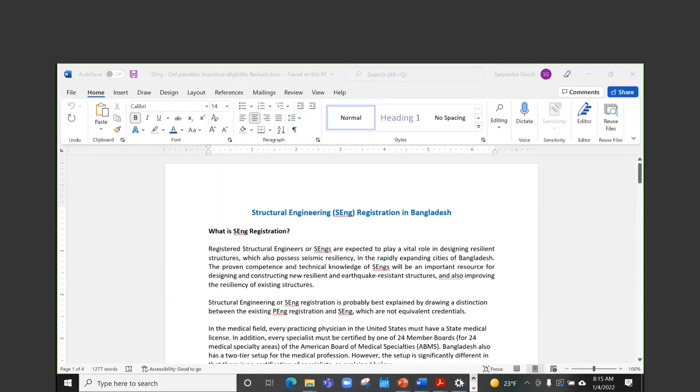So we have a two-part presentation today. The first part is just a general introduction to building codes. We thought that that would be an appropriate beginning to the whole program.

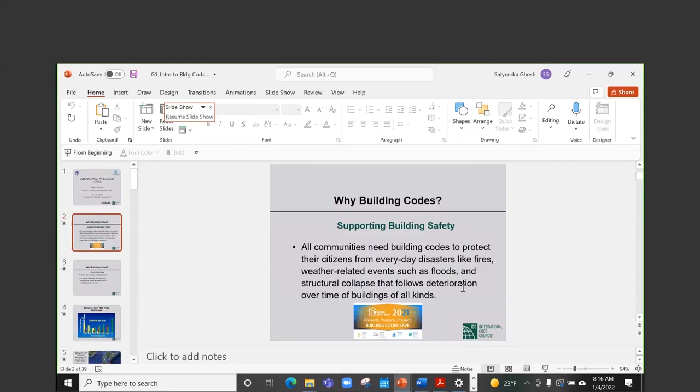Rather, first question, you're not on the slideshow mode or presenter mode. Oh yeah, okay.

Yeah. The first question is, we are spending a whole lot of resources and effort in trying to get BNBC 2020 implemented first and then enforced. But why? What is the importance of building codes? Why building codes?

So this is very basic. All communities need building codes to protect their citizens from everyday disasters like fires, weather-related events such as floods, and structural collapse that follows deterioration over time of buildings of all kinds. Okay, so protect citizens from everyday disasters, protect citizens from disasters that happen once in a while like floods, and

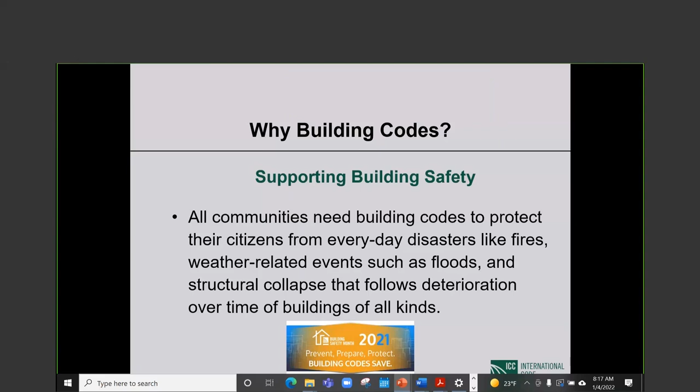age-related deterioration ultimately will destroy any structure, and to the extent that we can take steps to preserve structures to prolong their life, that also belongs in building codes. Building codes serve as a means of prevention. In a very basic sense, building codes prescribe preventive measures to keep bad things from happening. It provides us with a choice between an ounce of prevention today and a pound of suffering in the future.

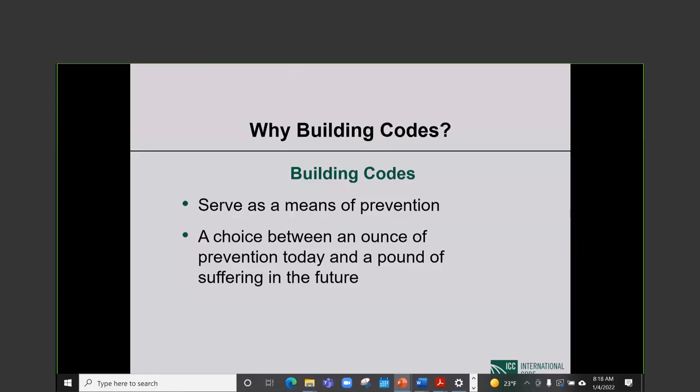If we build code complying structures, chances are very high that for many decades, the structure will serve our purposes satisfactorily with minimal maintenance. But if we don't do things right in the first place, we do not comply with the code, we cut corners, then the consequences can be quite unhappy and may result in a whole lot of suffering.

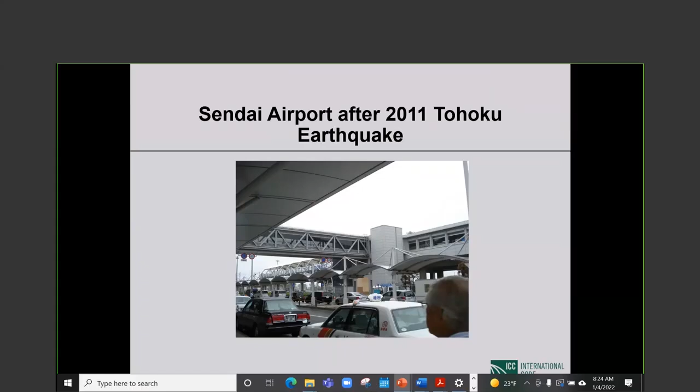We saw damage. It was not damage free, but considering the magnitude of the earthquake, the damage was very light indeed. When we came out of the airport waiting to be picked up, this is what the city looked like. You look at the traffic. There was essentially no sign of an earthquake having taken place just 3 or 4 weeks before. If you looked hard, yeah, there were signs, but there was basically not a whole lot to see.

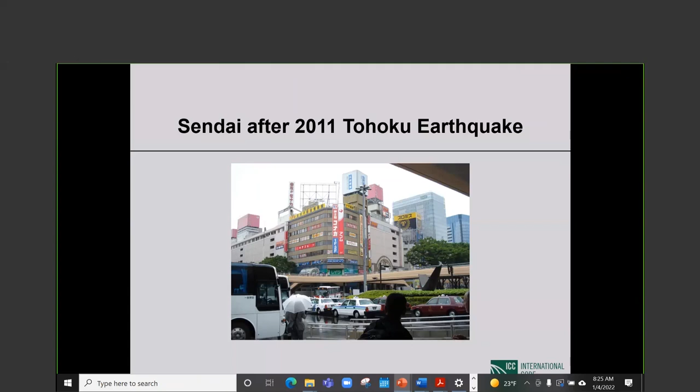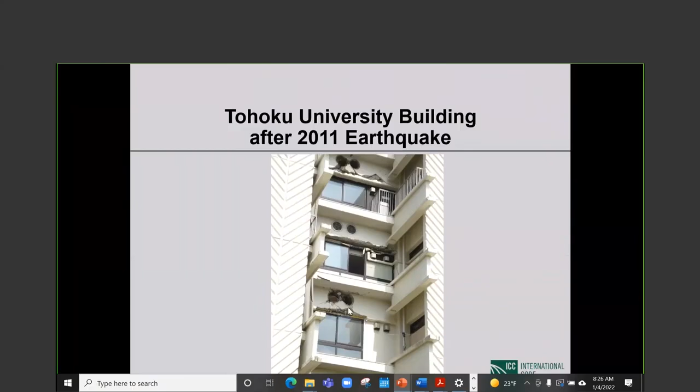So I'm not saying that there was no damage, but if you drove around the city, you might not see a whole lot until somebody pointed things out to you, and then you did see earthquake damage. Now, we were taken to the campus of Tohoku University just outside of Sendai, and many of the university buildings were old. This is one of them. These are shear walls that are coupled, as you will see in the next picture. These coupling beams between the shear walls had openings for some reason. I do not know why. And those suffered pretty much as expected, very major, very substantive damage.

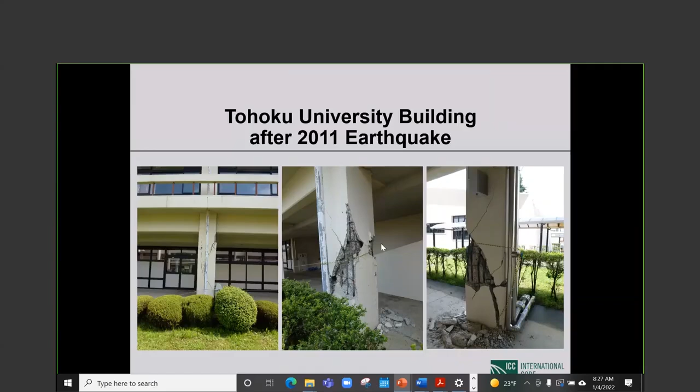And then the columns of the building, this is an older building, the columns had the pre-1981 detailing. This we would call non-ductile detailing, the main feature of which is that you have plenty of longitudinal reinforcement, but hardly any transverse reinforcement. There are typically ties at 14-inch or so spacing. The ties are once around. There are no cross ties or anything, and the hooks at the ends are 90 degrees. Everything is wrong, and those columns always suffer shear or shear compression failure, as you see in these pictures. So in this older building, there was plenty of damage to be seen, but as I mentioned, buildings designed and built by the later codes did incredibly better.

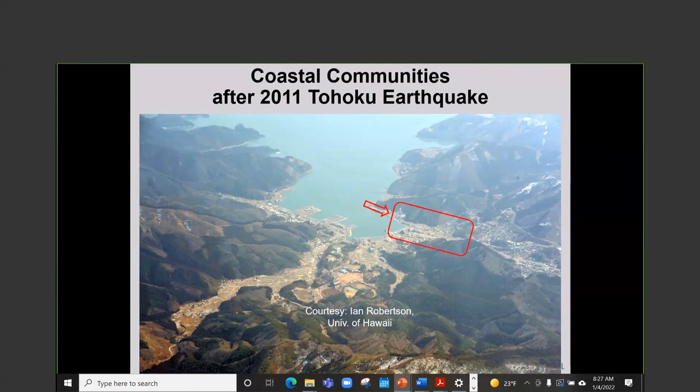The tsunami was a totally different story. All the coastal communities, there were fishing villages or fishing towns, and this is one of them. I don't remember the name now, Onagawa, something like that. You went to any of these places, and we went to many. It really is very depressing even to watch. All you saw was an occasional concrete building still standing up. When I say building, it is the skeleton of the building.

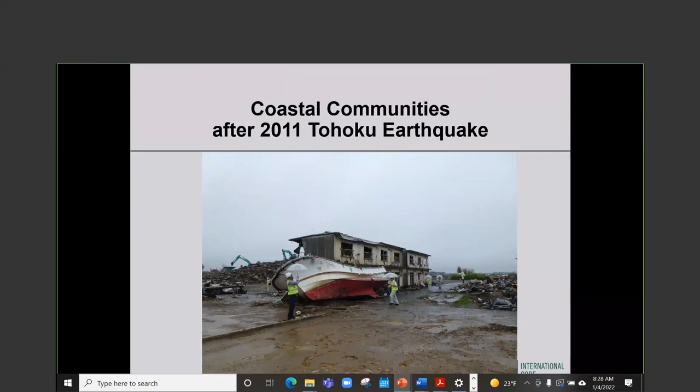Everything else is gone. People's possessions are all over the place. Children's shoes, family photographs, clothes. Typically they were collected in heaps, and other than some workers, there was no one around. It was total, complete devastation, in stark contrast with what happened as a direct result of the earthquake. So tsunami is a different story. We will not go into that today.

But my point in showing you everything so far was that Japanese building codes are technically sound. Much more importantly, they are very strictly enforced, and as a result of that, I would say post-1981 structures, particularly post-1991 structures, have performed very, very satisfactorily in recent Japanese earthquakes. Earthquake threat is not taken seriously in Bangladesh, at least by the public, although the World Bank seems to be very aware that it exists and that it may cause very, very serious problems.

And it is true. I think many of you in Dhaka felt an earthquake about a month ago, this particular earthquake of magnitude 6.2 that originated outside of Bangladesh in Burma. This was the epicenter of the earthquake. This is Dhaka. So, 6.2 is not small. It's not a large earthquake, but it's not a small earthquake.

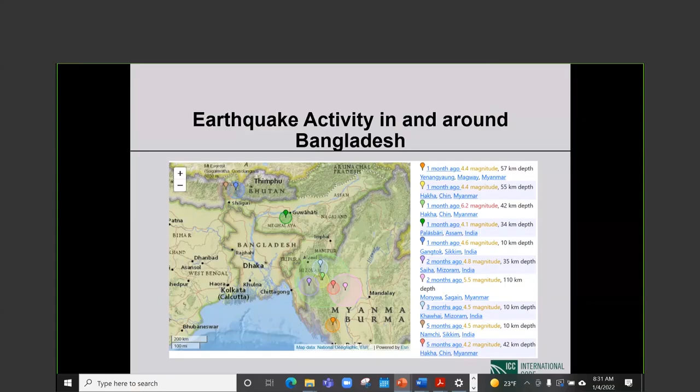And the epicenters of these are earthquakes in the last month or so. So there is earthquake activity going on. Luckily, the largest one in the last month has been 6.2. And the epicenter is far enough away, at least from Dhaka, not from the border of Bangladesh, but a larger earthquake closer in, you can easily appreciate, might cause much more severe consequences.

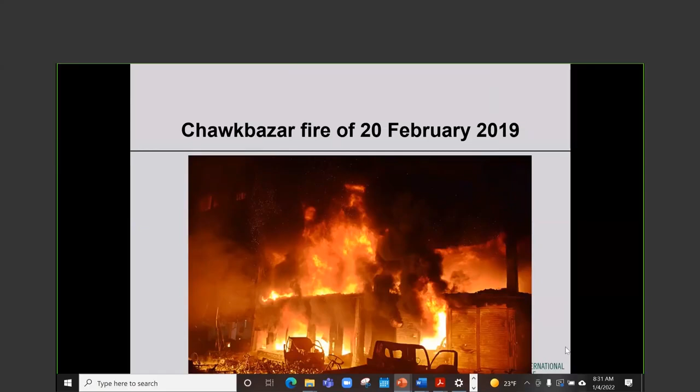Earthquakes are natural disasters. The disaster that really has haunted the public in Dhaka and in Bangladesh is the man-made hazard of fires. I will mention only two: the Chawkbazar fire of 20th of February of 2019. This is what happened. A fire, and much of these things should not happen. That's the point. A fire started as a result of a road accident, of all things, between a pickup van and a private car. After the collision, a gas cylinder stored in the private car exploded.

The first place the flames hit was a chemical warehouse on the ground floor of a 5-story building, and the flames quickly spread through 4 other buildings, including a community center where a wedding party was on. The fire left at least 80 people dead and 50 others injured.

So imagine, this is a chemical warehouse on the ground floor of a building where people live in a congested neighborhood. This definitely is not permitted by any code. This should have been detected by enforcement personnel and totally gotten rid of. Obviously, that was not the case, and people died. Dying is kind of final. What also happens is people get injured and people become homeless. There are endless dire consequences to deal with by the families and by the authorities, and it's just a tragedy all around.

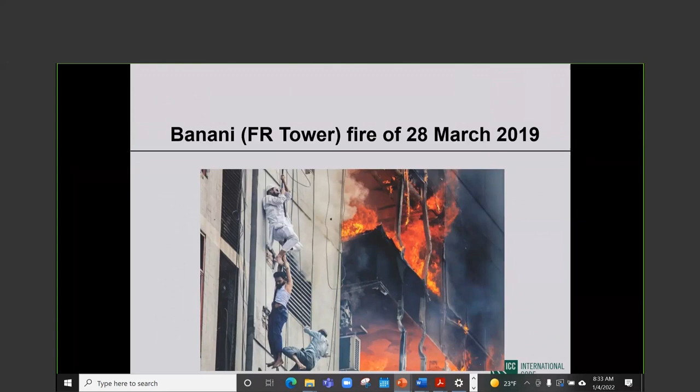The more recent, the FR Tower fire in Banani. This was March of '19. The FR Tower, which was built before 2006, did not have a single fire protected staircase, and the main staircase was filled with choking smoke. At just 0.6 meter, the spiral staircase outside, and 1.2 meter wide, the main staircase inside, the building's two exits were too narrow for people inside to leave easily. They were also blocked by obstructions that made the task even harder.

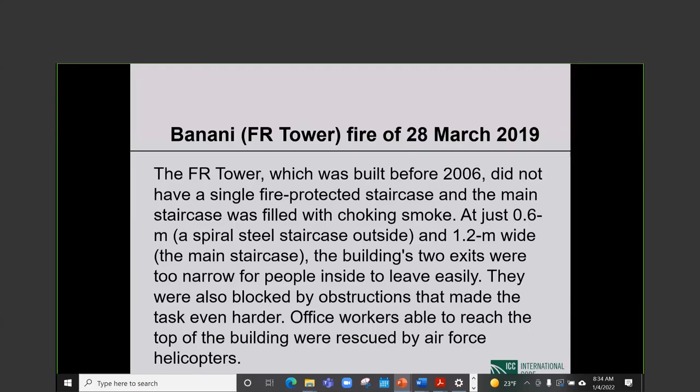Office workers able to reach the top of the building were rescued by Air Force helicopters. This is now the telling thing. According to news reports, the Bangladesh Fire Department had sent 2 letters in the prior 2 years highlighting the dangerous lack of safety in the building. Authorities knew the multi-story block was unsafe. The tower building, in fact, was supposed to be just 18 stories high, but was illegally extended to 23 floors. All of you know all these stories, and even the details, but the point is that code violations lead to major tragedies that are totally avoidable.

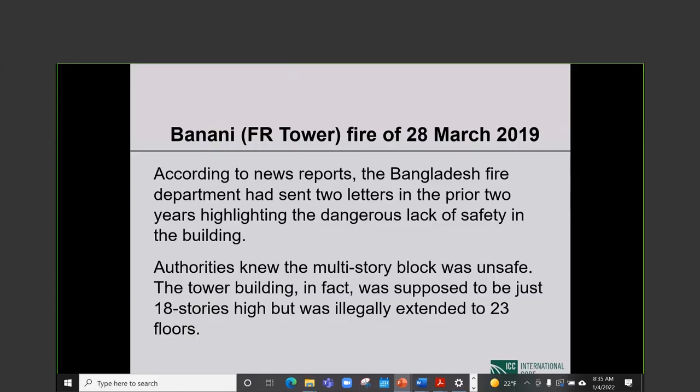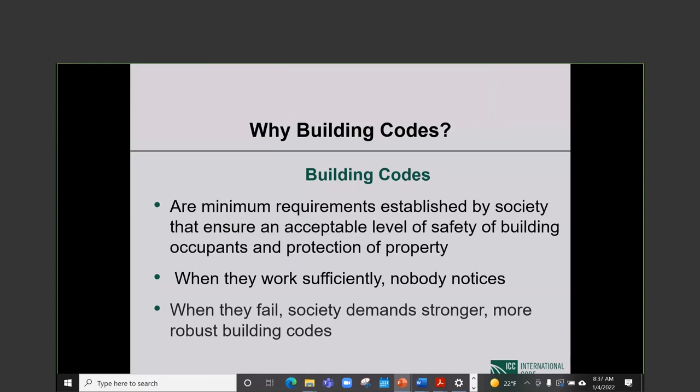Evolution of building codes. The first known building code was the Code of Hammurabi. This is 2000 BC, roughly. And Hammurabi not only had a building code, he had a comprehensive code on essentially how life should be conducted in all its facets.

And some of it is very interesting reading, just like the building code. In the case of collapse of a defective building, the builder is to be put to death if the owner is killed by accident. So this is eye for an eye, tooth for a tooth kind of a thing. So the builder is to be put to death if the owner is killed by accident, and the builder's son will be put to death if the son of the owner loses his life.

The interesting part to me is no mention of the daughter or wife or anything. It's the builder, the owner, the builder's son, and the owner's son. I guess 2000 BC, that's how society was. But anyway, very simple concept. It is about building falling down, structural stability or failure, and the punishment is rather severe, as you can see.

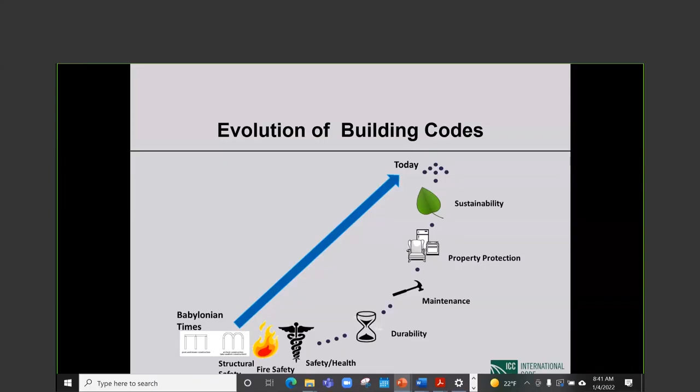And the final thing today is resiliency, not just seismic, but resiliency, meaning a whole community being able to bounce back quickly after a natural disaster. That is now seriously becoming a code consideration. And I expect that in the next 6 to 10 years, there will be major strides made, at least in the United States.

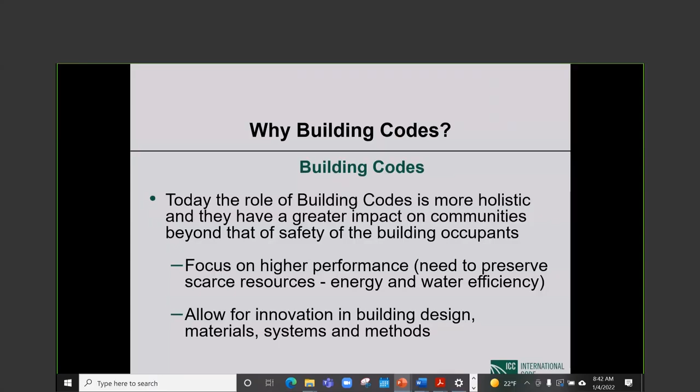So today, the role of building codes is more holistic, and they have a greater impact on communities beyond that of safety of the building occupants. There is focus on higher performance, need to preserve scarce resources, energy, and water efficiency. Also, allow for innovation in building design, materials, systems, and methods. That has been coming in gradually, and all of these things can be discussed at some length, but obviously this is not the occasion.

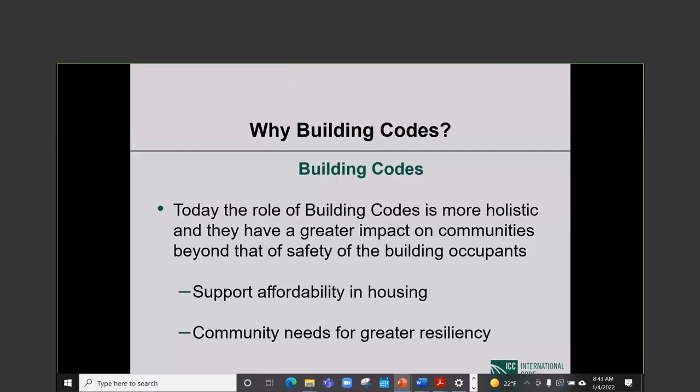So continuing in the same vein, today the role of the building code is more holistic. Affordability in housing, to support availability, to support affordability, the so-called low-cost housing. Even that has come into some codes. How to make livable structures at lower cost. Can the code do something to facilitate that? Then community needs for greater resiliency, which I mentioned already.

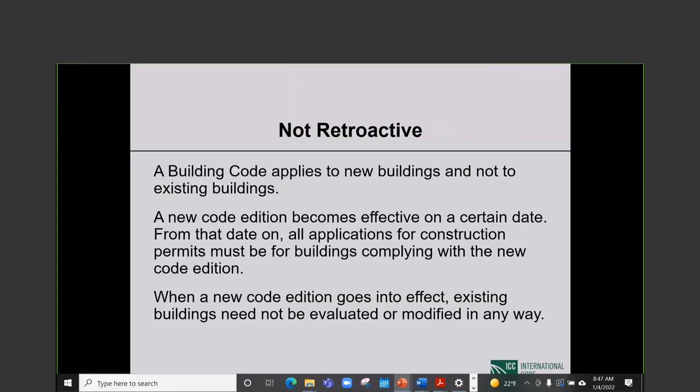Having said that, if an addition or an alteration is made to an existing building, depending upon the extent of the addition or the alteration, the addition itself, the altered portion, or if the addition or alteration is major, then the entire altered building may have to comply with the code in effect at the time the permit for such addition or alteration is applied for.

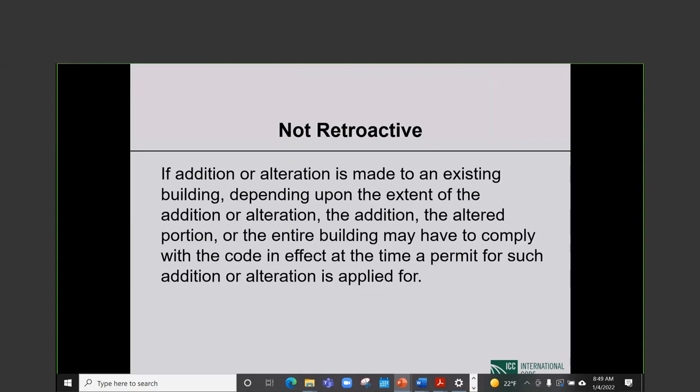Okay, so these are commonly called triggers. How, when is an addition so large that the entire building, including the addition, has to comply with the new code? These are typically referred to as triggers, and that goes into significant other territory that is not our subject today.

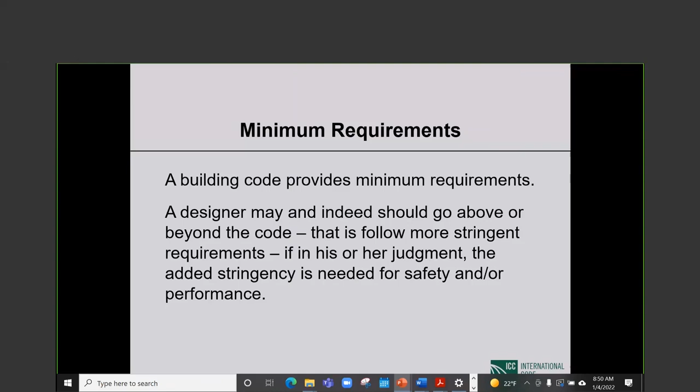The code is the minimum. What should be done to the structure should be decided upon by the professional—note that the code minimum is not always the right answer. Then I titled this 'More is not necessarily better.' I think all of you need to keep this in mind for all time to come. An over-reinforced concrete member performs much worse than an under-reinforced member in an overload situation.

I have seen so many places, because the reinforcing steel is more expensive than the concrete, the layman's way of looking at it is: if you put more reinforcement into a column, you have a better column. You've got more for your money—that is absolutely not the case.

So an over-reinforced concrete member performs much worse than an under-reinforced member. The over-reinforced member tends to fail explosively and without warning—that is the difference. If an over-reinforced member is overloaded, it will fail all of a sudden and explosively. If your column has a lower amount of reinforcement, it will probably fail, but fail gradually. It will give you warning—it will crack first, it will deflect first. You will know that something is going wrong.

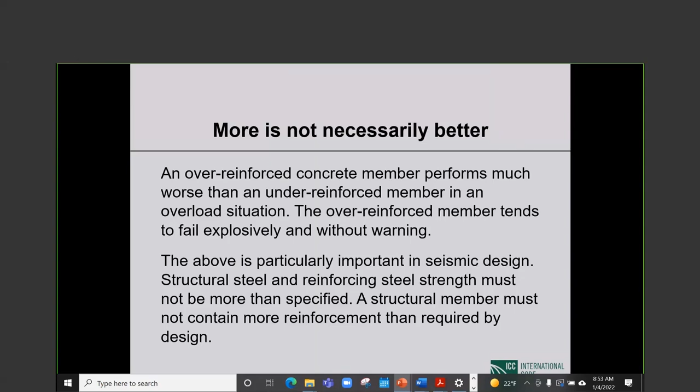Okay, so again, all of these I could elaborate on, and there will be occasions when I will do that in this training program. But please do keep in mind: more is not necessarily better, and that is particularly true in earthquake situations.

The act of putting something into effect, that is implementation. What is enforcement? Enforcement is making sure that rules are followed, that violations are rectified, that violators are penalized or punished.

Now, BNBC 2020, which is our code today, the gazetting of that document after a long wait happened on 18th of February, it should be 2021. Last year, I don't know, that's a major mistake.

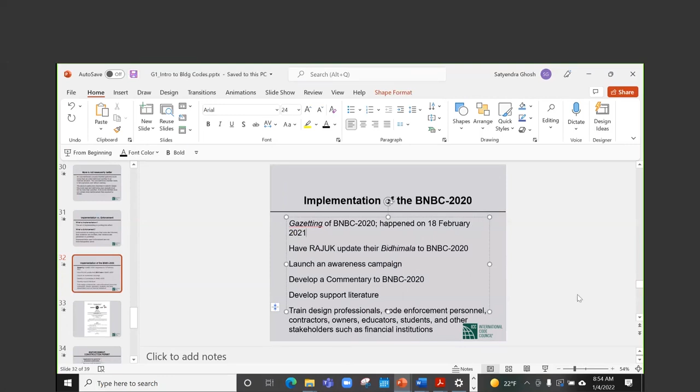So to implement this document, Rajuk will need to update their Bidhimala to BNBC 2020, which is underway, I'm happy to say. I think I know that progress has been made, although the effort has not been completed.

Launch an awareness campaign. We have various things going on. We have not emphasized the new edition versus the old edition kind of thing, which for professionals is important. This is something we probably should still think about.

From the beginning, we have felt that a commentary to BNBC 2020 is an absolute necessity. Professionals have told us so, and hopefully as part of phase 2 of this URP Rajuk part, we will get to do that. Develop support literature, how to design using the building code.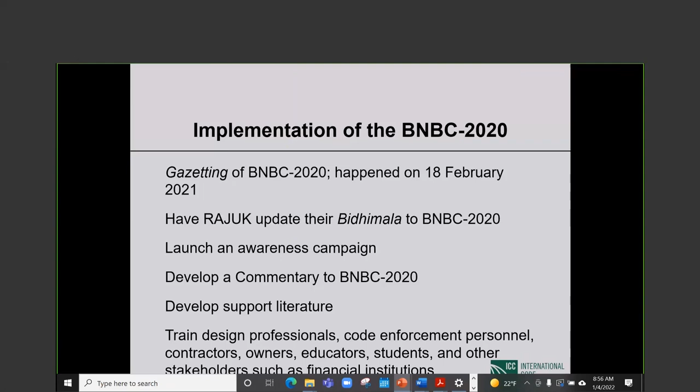That is the role of support literature. It is not commentary. It tells you how to use the code in designing and constructing structures. That is needed. And then training of professionals at all levels. So all those are parts of implementation.

So this is what the gazetted BNBC 2020 looks like. You may see this picture once or twice more. So we just talked about implementation.

Enforcement has essentially two parts. When an owner or a developer wants to put up a building of some kind, a structure of some kind, he has to apply for a construction permit to the authority having jurisdiction. And he will have to submit to the jurisdiction drawings and calculations for the structure that he wants to construct.

These drawings and calculations must be in accordance with, must be in compliance with the building code in effect. The jurisdiction needs to check that and make sure that there is compliance.

If the jurisdiction finds that the drawings and calculations comply with the code, they will issue a permit, and then construction can proceed. If, however, they find that there are problems, there is non-compliance, they will ask the submitter to redesign and resubmit. That decision by the jurisdiction is typically subject to an appeal.

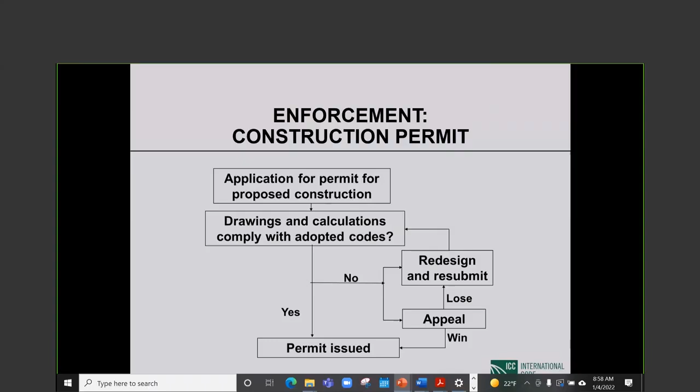This part of enforcement depends on the ability of the jurisdiction to do a proper plan check. I do want to emphasize that.

Now, we found that there is no fire safety plan review for residential buildings up to 6 stories in height in Bangladesh. Residential buildings up to 6 stories in height may have 500 people in one building sleeping at night. No fire safety plan review for those buildings. Not even indirect requirement to meet BNBC fire safety requirements. This we thought was a so-called gaping hole.

Second part of enforcement, we talked about design. Now you have a permit, so now it is construction. Construction has to be inspected. The inspectors have to make sure that the construction is in accordance with code requirements.

If that is so, then the inspector will so declare, and the applicant will get what is called a certificate of occupancy. Then he can go ahead and use the building for whatever purpose the building was erected. If, however, the inspectors detect that there are violations of the code, then a certificate of occupancy will be denied, and then they will have to rectify all the problems that have been found and go back to the jurisdiction and get a certificate of occupancy.

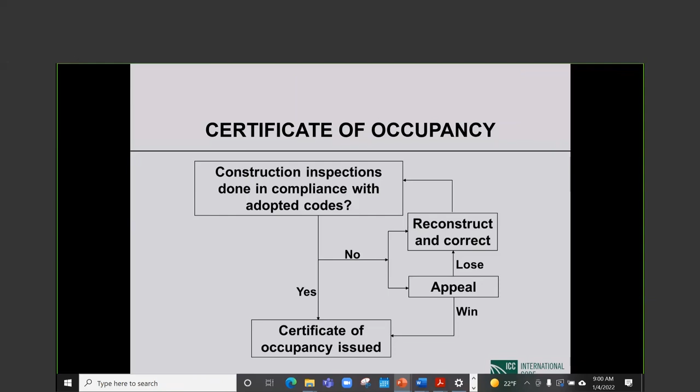So this inspection is also a very integral part of code enforcement. We found that there is no fire safety inspection for residential buildings up to 6 stories in height in Bangladesh, or at least in Rajuk jurisdiction.

So we have made a whole lot of recommendations in our enforcement program report for project S9. One volume of this 4-volume report has the recommendations only. I think the recommendations are written in understandable terms, and two of the major recommendations concern plan review and inspection of structures.

In both cases, in view of Rajuk's limited manpower and resources, third-party plan checkers and third-party inspectors should be employed to enhance the process. They will be an extension of Rajuk, with no power of their own that is not delegated by Rajuk. So we have elaborated on every aspect of our recommendation, and I will leave it at that.

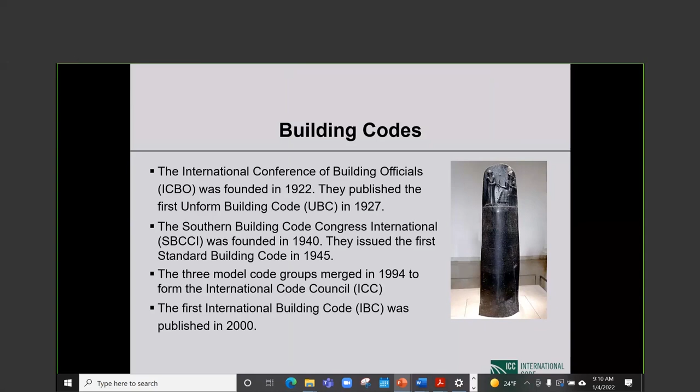Housing and Building Research Institute undertook the BNBC update project in 2009. Final version of the updated code was submitted for approvals in 2015. It was approved by the steering committee, the Ministry of Housing and Public Works, vetted by the Law Ministry, but the final approval somehow took an incredible amount of time until in February of '21, the document was gazetted and it has been called the 2020 edition of BNBC, although I do not believe from 2017 onwards the document has been touched.

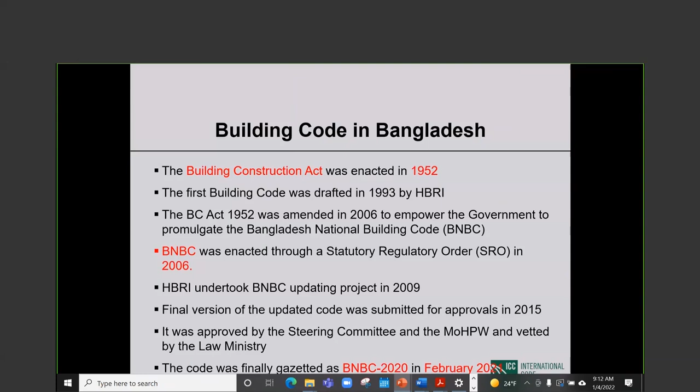Be that as it may, so the 2020 edition is the second edition of the Bangladesh National Building Code, gazetted less than a year ago. At the same time, this is the only time I will throw this in. This code, because it was started in 2009, is already outdated in many ways and badly needs updating in certain areas, which effort should get underway hopefully soon.

The purpose of the BNBC is to establish minimum standards for design, construction, quality of materials, use and occupancy, location and maintenance of all buildings within Bangladesh in order to safeguard life, limb, health, property, and public welfare.

Building code is not meant for the general public. This is important. A building code is not printed for just anybody to read. Okay, this is not something you take to bed to read before sleep comes to you. It's not that kind of a document. Building code is written for professionals, and it's like law books or medical books. Unless you have a certain background, it will not mean much to you, and that needs to be kept in mind. Okay, so the building code is written for professionals with a certain background.

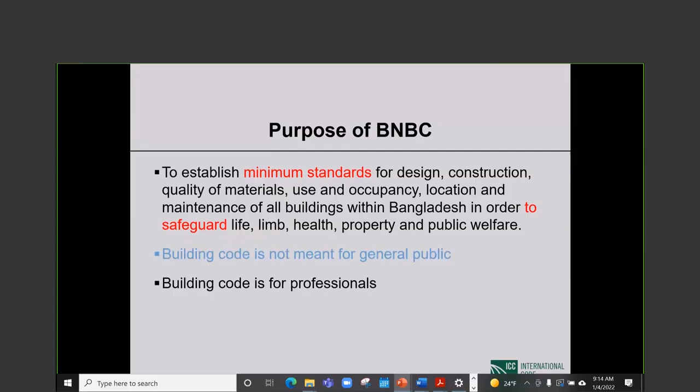Definition of building: any permanent or semi-permanent structure which is constructed or erected for human habitation or for any other purpose, and includes but is not limited to the foundation, plinth, walls, floors, roofs, stairs, chimneys, fixed platform, veranda, balcony, cornice, projections, extensions, annexes, etc.

A few of Dr. Rakib's slides I have modified. This one I have not modified. This is the exact language he had there. It is probably taken from BNBC. Anyway, building also includes the sanitary, plumbing, electrical, HVAC, appurtenances, and all other building service installations which are constructed or erected as an integral part of the structure. So all of that is building.

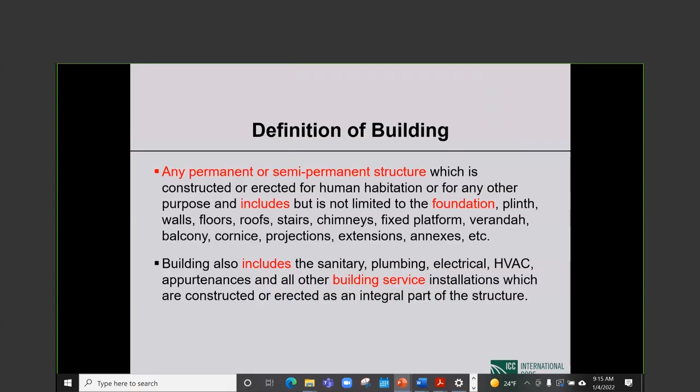Now here we make a distinction between buildings and non-building structures that I will not go into right now. So this definition of building will pretty much include non-building structures as I read it.

BNBC, I think all of you know, is in 3 volumes. Volume 1 has parts 1 through 5. Part 1 is scope and definition. Part 2, administration and enforcement. Very important part of the code, not to be minimized. People see administration and enforcement, they move on, but that is not the right thing to do.

So this Part 2 really needs to be read and understood. Part 3, general building requirements, control and regulation. Part 4, very importantly, is fire protection. Part 5, building materials as opposed to design using building materials.

Okay, building materials themselves. Volume 2, all of Volume 2 is just Part 6, structural design. I should not say just Part 6. That is a huge part that talks about structural design in all the materials that are allowed to be used in buildings.

Then Volume 3 has Parts 7, 8, 9, and 10. 7 is construction practices and safety. Part 8 is building services that we were talking about, electrical, mechanical, energy, all of that. Part 9, very importantly, addition, alteration to, and change of use of existing buildings. And Part 10 are signs and outdoor display.

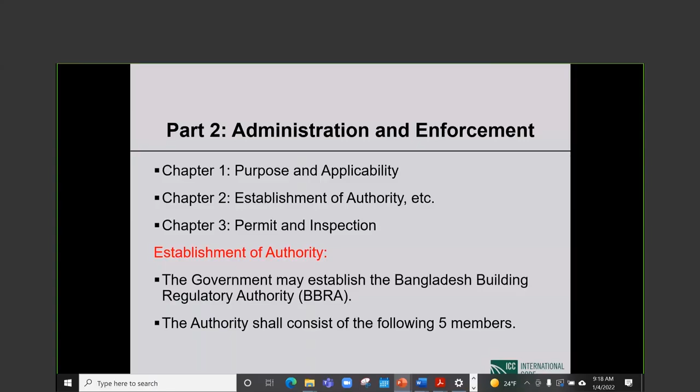Under establishment of authority, BNBC says the government may establish the Bangladesh Building Regulatory Authority, BBRA. That has not happened, but the code gives provision for this. The authority shall consist of the following 5 members, which we have not gone into in the slide. The authority, BBRA, shall designate specific geographical jurisdiction as the office of the building official. So Rajuk would be, for instance, the office of the building official.

The building official shall exercise his power and responsibilities through a building construction committee. That's how it works at Rajuk and the other authorities that we have been familiar with. The authority may constitute a board of appeal to hear and decide appeals of orders, decisions, or determinations made by the building officials. So the building officials' call is not final. It is subject to appeal by this board of appeal.

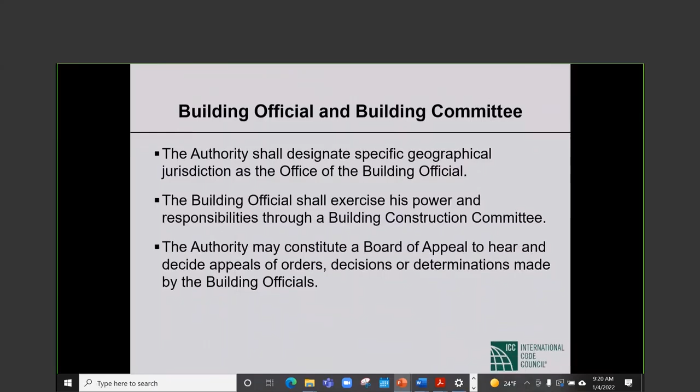Jurisdiction of building officials. Remember, the language was BBRA, the authority shall designate specific geographical jurisdiction as the office of the building official. So this is where this list comes in. Areas under the master plan of Rajuk, the authority is Rajuk. Areas under the master plan of Chittagong Development Authority, the Chittagong Development Authority is the authority. Similarly with Rajshahi Development Authority, with Khulna Development Authority.

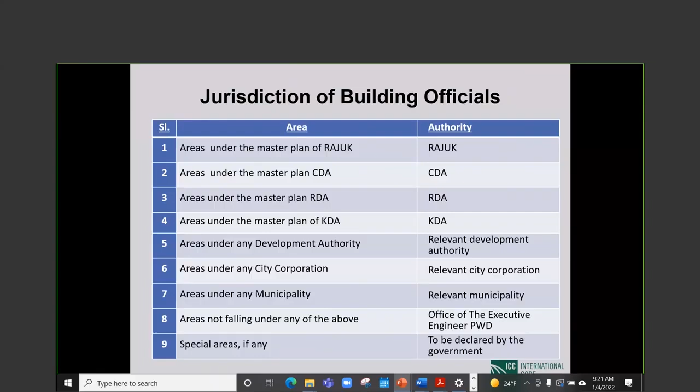Areas under any development authority, the relevant development authority is the office of the building official. Areas under any city corporation, the authority is the city corporation. Areas under any municipality, the municipality is the jurisdiction. Areas not falling under any of the above, very importantly, office of the executive engineer of PWD is the authority. Where there is no development authority, corporation, or municipality, the office of the executive engineer of PWD is the authority. Special areas, if any, to be declared, then the government decides case by case who the authority would be.

Types of permits and building categories. So first of all, the permits. There are a number of permits depending upon the structure that may have to be taken out. Land use certificate. Validity of that certificate is 24 months. You have to do something on the land within that period. Otherwise, the certificate lapses and you have to take out another one. Upon proper application, Rajuk is supposed to give it to you within 15 days.

Large and specialized project permit, validity 24 months, time that Rajuk has to process and issue it to you 45 days. Building permit validity 36 months. So this permit without which you cannot construct is valid for 36 months. If you don't do anything in that time, then it lapses. And Rajuk has 45 days to process the application and issue the permit.

Occupancy certificate has perpetual validity, although I think it has to be renewed every 5 years. I believe that is the case, or maybe it is our proposal. Anyway, the time that Rajuk has to issue it is 15 days.

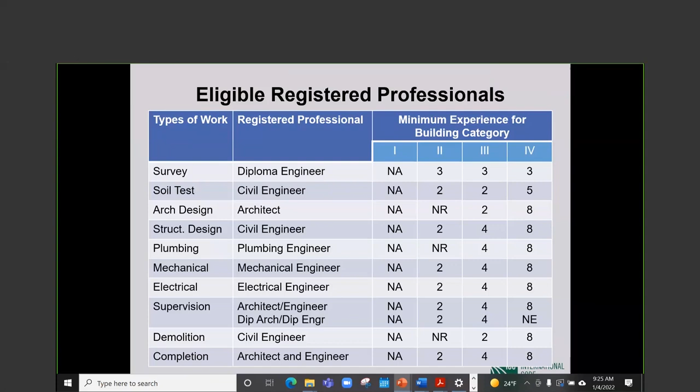This type of a table is definitely not in any US code, but I think this serves a very, very good purpose. Okay, so everything is spelled out, and the table number is not on the slide, but this is a table directly in BNBC 2020.

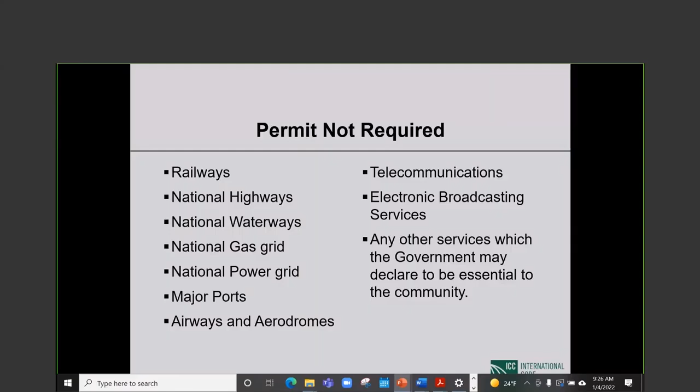For many things, a building permit is not needed, mainly because they are really not buildings. Railways, national highways, national waterways, national gas grid, national power grid, major ports, airways and aerodromes, telecommunications, the towers and so forth, electronic broadcasting services, any other services which the government may declare to be essential to the community.

Responsibilities of the owner. This is spelled out in BNBC. Some of this stuff is kind of important. The owner shall be responsible for carrying out the work in conformity with this code. Okay, that's the owner's responsibility. The owner is ultimately responsible for code compliance. It's not the people that the owner hires. Design, execution, and supervision work shall be carried out by authorized registered professionals. Owner shall allow the building official to enter the premises. This is required. This is his responsibility.

The owner shall obtain permit as may be applicable. That again is owner's responsibility. The owner shall inform the building official about attainment of construction work at different stages, like stage by stage completion kind of thing. Should keep the building department apprised. The owner shall take proper safety measures, very, very important. The owner shall notify the building official of the completion of the work. The owner shall preserve at the site a copy of all permits.

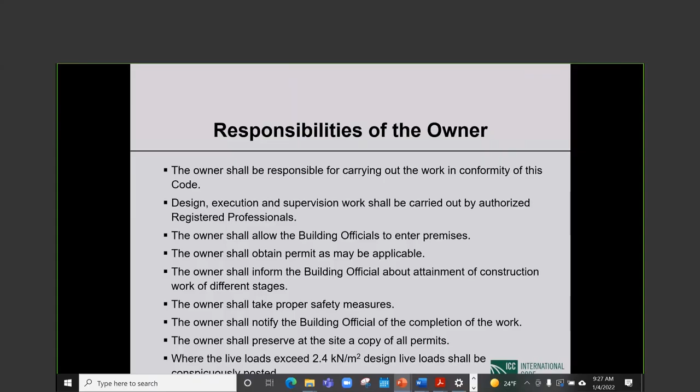Where the live load exceeds 2.4 kilonewton per square meter, designed live load shall be conspicuously posted. This is a code requirement. Heavy live loads.

Unsafe buildings. All buildings that constitute danger to public safety or public property shall be declared unsafe by the building official. In case the owner fails, neglects, or refuses to carry out the repair or improvement of an unsafe building, the building official shall cause the danger to be removed either by demolition or repair, the cost of which shall be borne by the owner. Okay, so these are pretty significant powers being given to the building official, as you notice. Now, this results in litigation and all kinds of things, but building official does have the power.

If the building official determines that an unsafe building constitutes imminent danger, the building official shall at once cause such building to be rendered safe or removed. I think this kind of power given to the building official makes a lot of sense. This is public safety. At the same time, you know, this kind of determination is not easy, and these things tend to get messy. The building official may also get the adjacent structures vacated and protect the public by an appropriate fence.

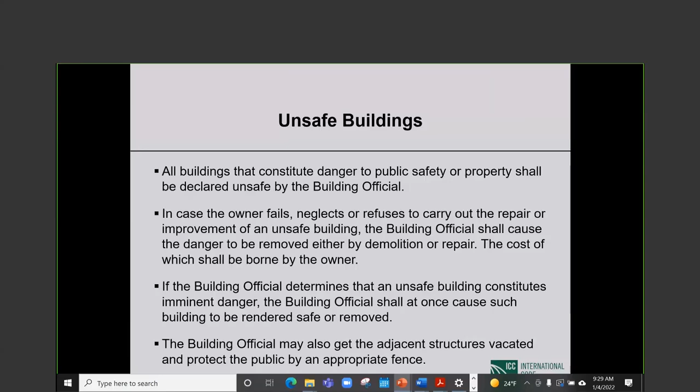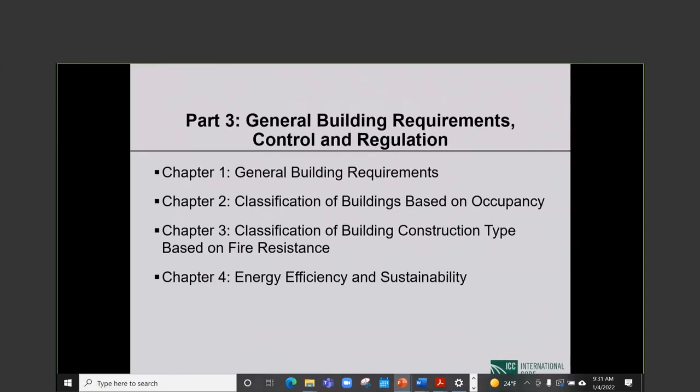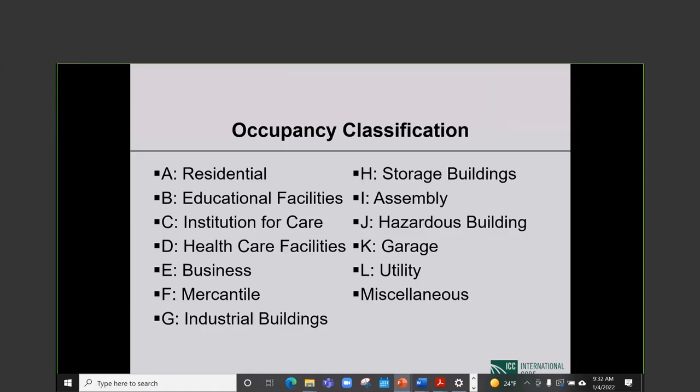So classification of buildings based on occupancy. That's what we are talking about here. So residential buildings, that would be type A, educational buildings, institution for care, healthcare facilities, business occupancy, mercantile, industrial buildings, storage buildings, assembly buildings, hazardous buildings, garages, utility, miscellaneous. Okay, so those are the classifications based on occupancy, and depending upon what classification you have, you may be subject to different regulations in the code.

Classification of building construction based on fire resistance. So there is non-combustible and combustible, group 1 and group 2. 1A is 4-hour fire rating, fire protected. 1B is 3-hour fire protected. So 1A is the highest resistance to fire, and 1E is unprotected. In the combustible division, 2A, as you see, is heavy timber, then protected wood joist, unprotected wood joist, protected wood frame. Unprotected wood frame is 2E.

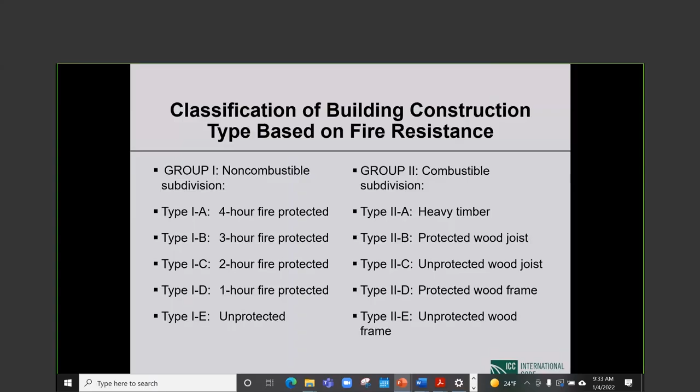So anyway, gives you an idea. This is classification based on fire resistance. Okay, non-combustible is group 1, combustible is group 2. In non-combustible, the fire rating dictates the type. 1A is the highest, 1E is unprotected.

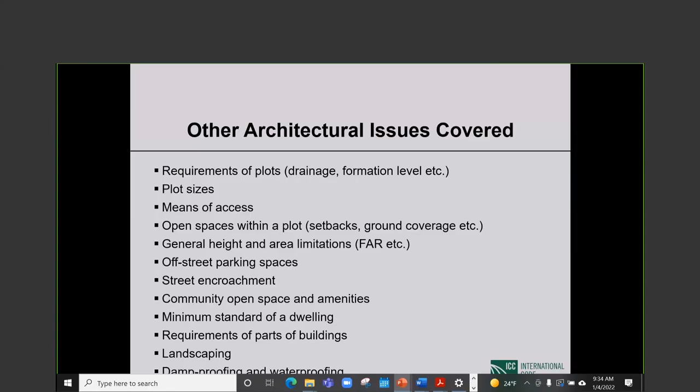Other architectural issues covered: requirements for plots, drainage, etc., plot sizes, means of access, open spaces within a plot, which would include setbacks, ground coverage, etc. General height and area limitations, the floor area ratio falls under that. Off-street parking spaces, street encroachment, community open space and amenities, minimum standard of a dwelling, requirements of parts of buildings, landscaping, damp proofing and waterproofing. Okay, all of that is covered in BNBC 2020, which is a pretty comprehensive document.

Energy efficiency and sustainability. All kinds of things are popping up all the time. So energy efficiency and sustainability, the scope includes: incorporate building concepts having a positive environmental impact and encourage sustainable construction practices, allowing efficiency and conservation of energy, water, and building materials, and to promote resource efficiency. It's kind of a complicated sentence, but it tells you quite a bit. So incorporate building concepts having a positive environmental impact. That's understandable as it is. Encourage sustainable construction practices, allowing efficiency and conservation of energy, water, and building materials, and to promote resource efficiency. The efficiency may have been said one too many times, but you get the idea.

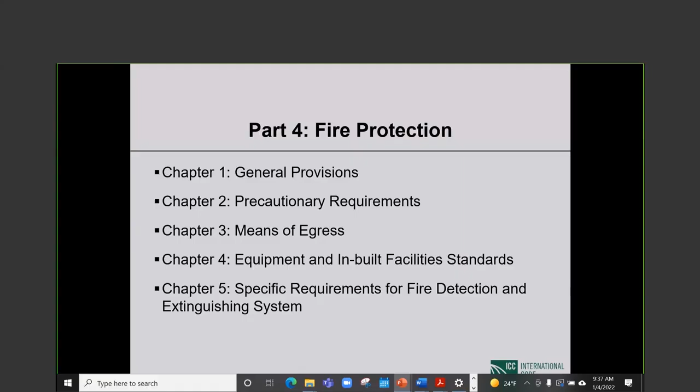So fire protection, in this slide set Dr. Rakib didn't go into details, but these are the topics covered. And some of these are huge topics, means of egress, for instance. Anyway, so in part 4, we have chapter 1, general provisions, chapter 2, precautionary requirements, chapter 3, means of egress, chapter 4, equipment and inbuilt facility standards, chapter 5, specific requirements for fire detection and extinguishing system. So pretty comprehensive requirements, although this may not be the most comprehensive if you look at codes of the United States and so forth.

Building materials, part 5, very important, and this is very instructive. How much is covered? When I say covered, this is specifically covered in BNBC 2020. You have sections, you have provisions, you have requirements. So, building materials covered: masonry, cement and concrete. Pre-stressed concrete is somehow separated from concrete, which I find interesting. Building limes. This would not be a separate material in the US. It is part of masonry. The Portland cement, lime, mortar.

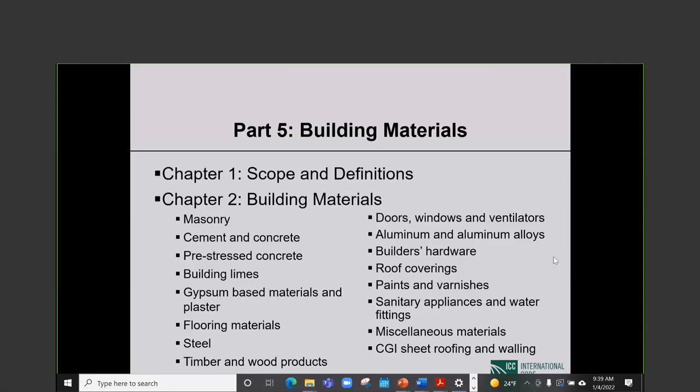Anyway, so building limes, gypsum-based materials and plaster, flooring materials, steel, timber and wood products, doors, windows, and ventilators, aluminum and aluminum alloys, builders' hardware, roof coverings, paints and varnishes, sanitary appliances and water fittings, miscellaneous materials, CGI sheet, I don't even know what that is, roofing and walling. Anyway, this is much more comprehensive than in any US code. I think you should be very happy that there is so much specific coverage of detailed topics, and I will leave it at that. Obviously, these things need to be updated. That's the problem, because things keep on changing.

Volume 2, as I mentioned, the entire volume has one part, part 6, on structural design. And that is a huge topic. People like me, that's the part we deal with. Okay, structural design, part 6. Chapter 1 is definition and general requirements. Everything here is important.

Chapter 2, loads on buildings and structures. That is a huge topic. Here you have the live loads on structures specified, wind loads, which is a topic unto itself, the design earthquake forces that you will use in your design, all of that is in this chapter 2.

Okay, chapter 3, soils and foundations, huge topic. Chapter 4, bamboo. Bamboo is something I don't know anything about, and I haven't frankly bothered to read that chapter, but anyway, it's there. Concrete material, chapter 5, concrete material, not the design requirements. The strength design of reinforced concrete structures is chapter 6. That chapter, I will have several lectures basically on that.

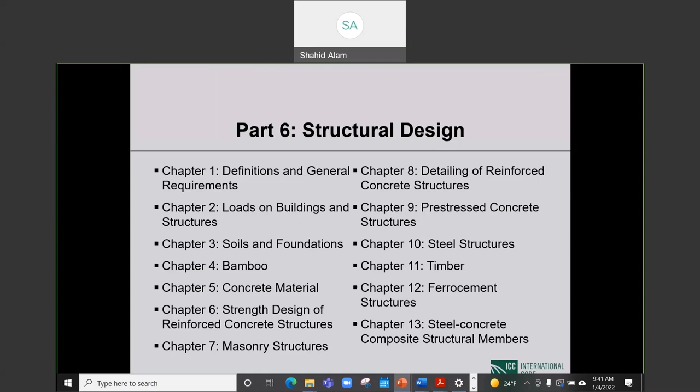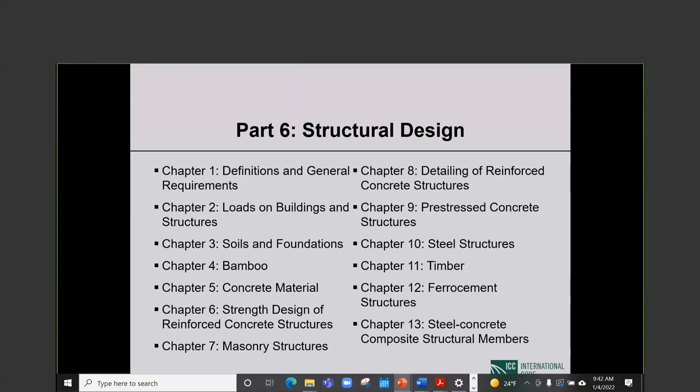Masonry structures, chapter 7. Detailing of reinforced concrete structures. I find it interesting that it's a separate chapter. This is where the seismic detailing is, and also what I would loosely call non-seismic detailing. So chapter 8. Pre-stressed concrete is a separate chapter 9. Steel, chapter 10. Timber, chapter 11. Ferrocement, chapter 12. That is not in US codes. And then steel-concrete composite structural members. How much of that is built, I don't quite know. But there's a chapter 13 on that.

Volume 3, the last of 3 volumes, has the construction practices and safety requirements in part 7. The chapters in there, construction practices and safety, are constructional responsibilities and practices, storage, stacking, and handling practices, safety during construction. This is extremely important stuff. In the US, there is a federal agency, OSHA, that takes care of some of this. Building code has the rest of it.

In Bangladesh, the entire regulations are in BNBC. To what extent they are being enforced, I don't exactly know. We do not have a clear picture, I should say. But anyway, these are all very important topics. Safety during construction, without which the workers are in trouble. This has been historically a problem in countries around the world. Okay, things have improved, but more improvements are always necessary.

So, construction responsibilities and practices, storage, stacking, and handling practices, safety during construction, demolition work should that be needed, maintenance, management, repairs, retrofitting, and strengthening of buildings. The retrofitting and strengthening part is far from comprehensive, but there are some things said in chapter 5. Building services, part 8.

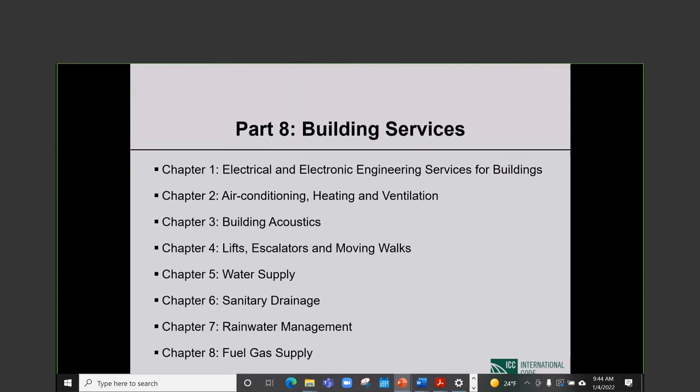This is a world unto itself, okay, which structural engineers know very little about. Electrical and electronic engineering services for buildings, air conditioning, heating, ventilation, building acoustics, lifts, escalators, moving walks, water supply, sanitary drainage, rainwater management, fuel gas supply, electrical building services, lighting. We are listing these topics because these are covered in the code. I hope you keep that in mind, that we have code provisions that will govern the installation of lighting.

So lighting, load estimation, fitting fixtures and accessories, wiring, substation and transformer, distribution system, switch and switchboards, overcurrent and short circuit protection, fire detection, alarm and emergency lighting, earthing, lightning protection, telecommunication, CCTV and access control system.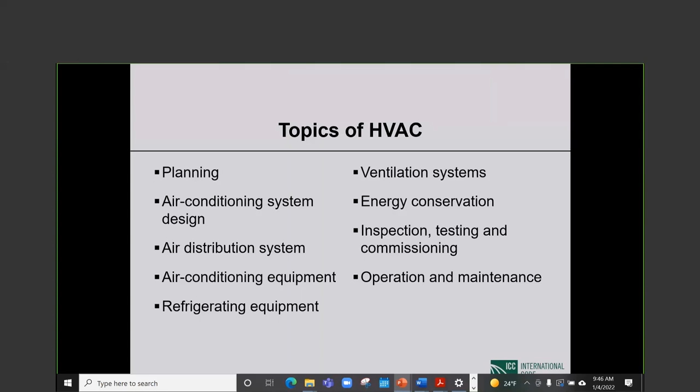I know that this kind of reading of a list is boring, but I hope that for a structural engineer or a civil engineer, this is in itself very good exposure to what the other professionals deal with, the electrical engineer, the mechanical engineer, all of whom have a role to play in the construction of a building. So this is what they're dealing with.

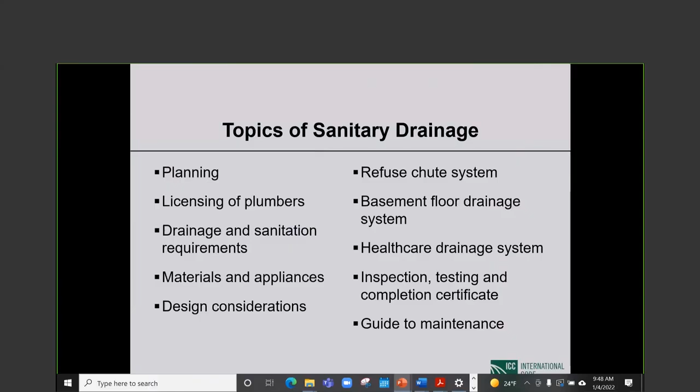Sanitary drainage, again, planning is involved: licensing of plumbers, drainage and sanitation requirements, materials and appliances, design considerations. The last number of slides simply gives you an idea of the scope of BNBC, how comprehensive a code it is.

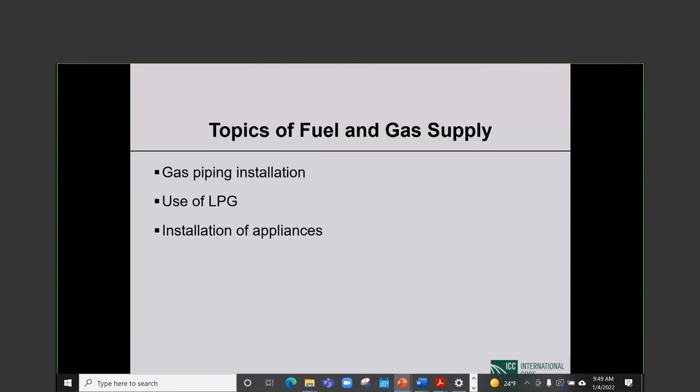Then the very important topics of alteration, addition to, and change of use of existing buildings. Not a lot is laid on the slides, but please pay close attention. This is very, very important stuff.

So, applicability of the provisions: no change in use shall be made without permission from the permitting authority. This is extremely, extremely important. You need a permit from Rajuk to do a change of use of your building. You cannot do it on your own.

No addition shall be made without permission from the permitting authority. First was change of use, second is addition. An existing building shall not be altered in such a manner that results in the building being less safe or less sanitary.

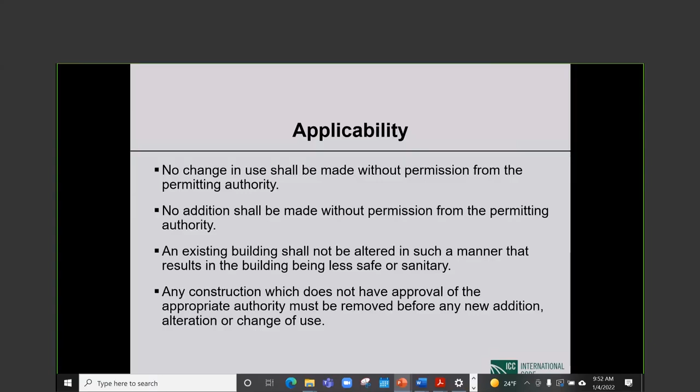Any construction which does not have approval of the appropriate authority must be removed before any new addition, alteration, or change of use. Everything said on this page I consider to be highly, highly important.

For the proposed works relating to alteration, addition to, and change of use, the owner of the building shall cause the existing buildings to be investigated and evaluated by competent professionals. This is extremely important. I could not overemphasize the importance of this evaluation.

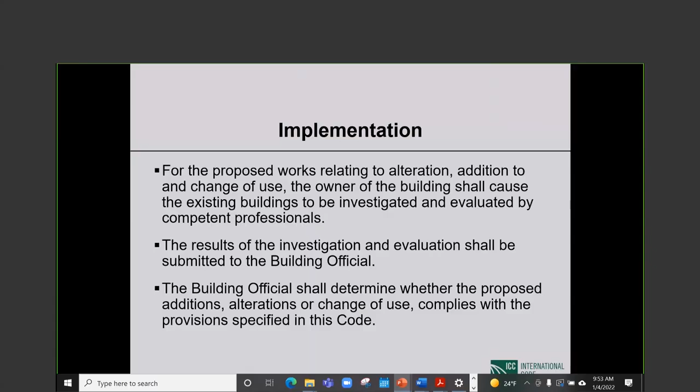The results of the investigation and evaluation shall be submitted to the building official. The building official shall determine whether the proposed additions, alterations, or change of use complies with the provisions specified in this code, meaning BNBC 2020.

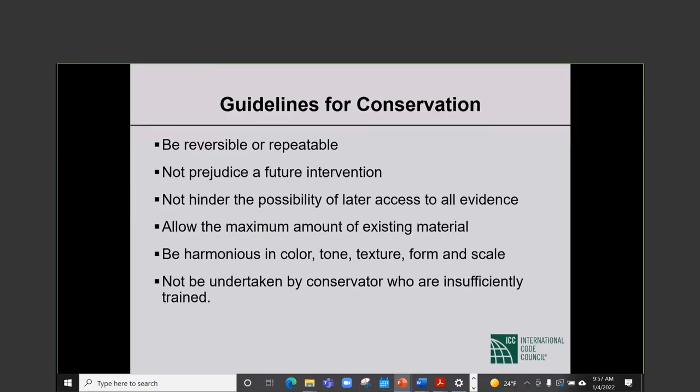All that makes sense, that's conservation: harmonious in color, tone, texture, form, and scale. It should not be undertaken by a conservator who is insufficiently trained. That is extremely important, it's very easy to mess things up, so adequate training is a must.

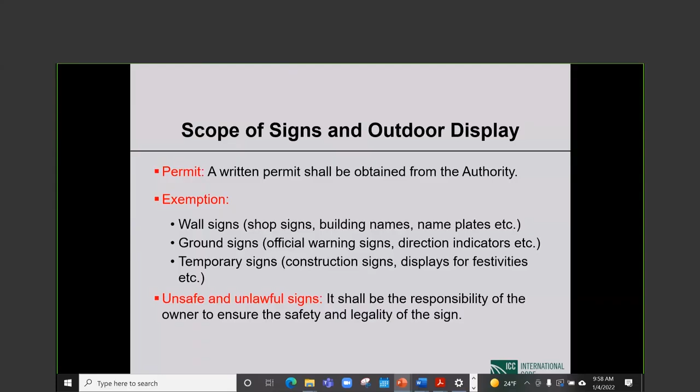For unsafe and unlawful signs, it shall be the responsibility of the owner to ensure the safety and legality of the sign. That probably goes without saying.

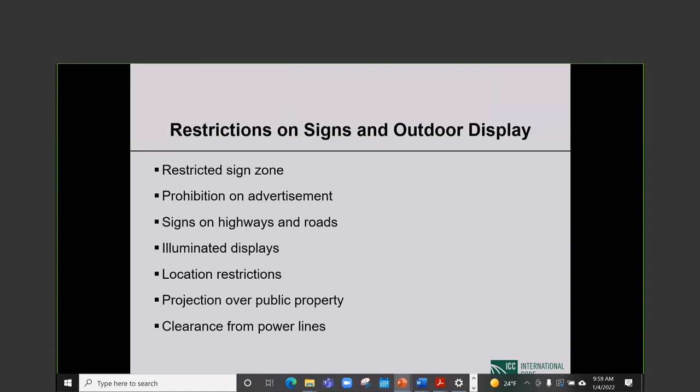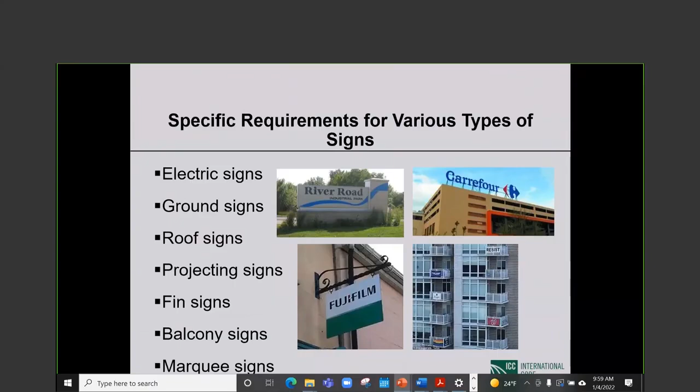That brings us to an end. So again, the second part was material prepared by Dr. Rakib, I did make some modifications here and there. Dr. Rakib would have done it better, but under the circumstances, I thought I would do it.

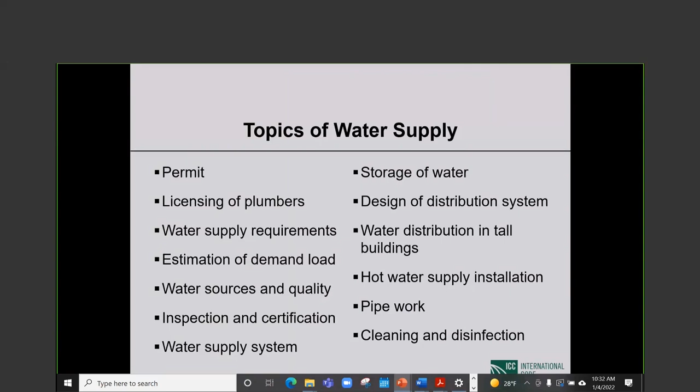Can you take me back? I don't know, just press escape. Let me... no, it's not working somehow. Oh, okay. How do I know when it's slide 52? There is no slide number. Can't you press escape once? Okay, well this is 40 or 56. Okay, so I've gone too far.

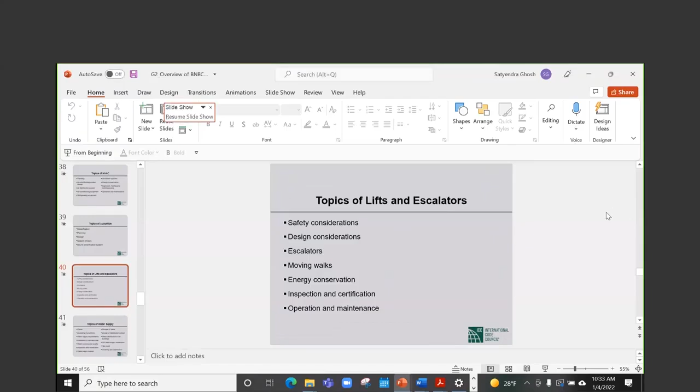So what's the question? Is it total floor area or each floor area considered in case of categorization of buildings to be supervised or designed in BNBC 2020? No, this one I'll put in the category where we will post an answer, because I don't want to answer without looking at the provisions. Dr. Rakib might know, but I don't deal with the fire related provisions.

Okay, okay. So the next question is also something Dr. Rakib will answer easily. It is: in BNBC 2020, how much live load is considered for a mosque? I did not get the live load cases. Let me see if I can easily find it. I probably can find it, but it will be easier to post it.